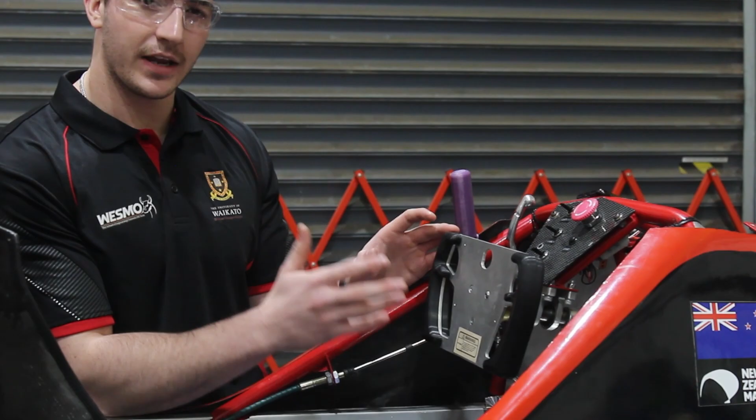WESMO's steering system has been one of the weaker sections of the car in the past, with drivers regularly complaining about the physical fatigue of driving the car. Because of this, my primary objective is to design a steering system that reduces steering effort as much as possible.

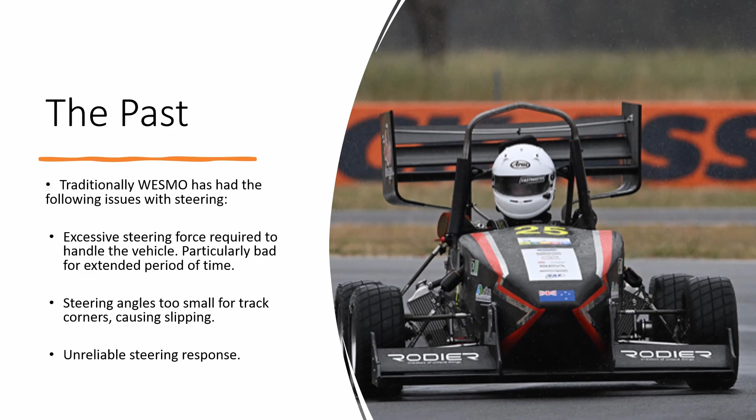The main sections of the car are the steering geometry, steering redirection and actuation systems. Each of these factors have a range of sub-factors that have a monumental impact on the steering performance of the car. So far, I have identified and chosen specific concepts for the individual elements that require design, such as the tie rod attachment position, steering rack, steering sensor, and the mounting brackets.

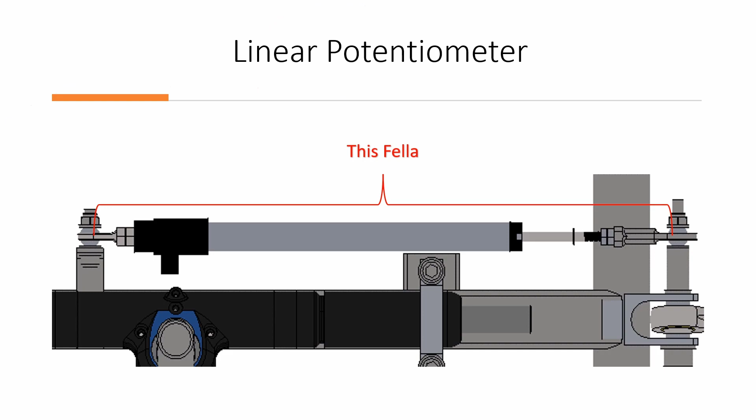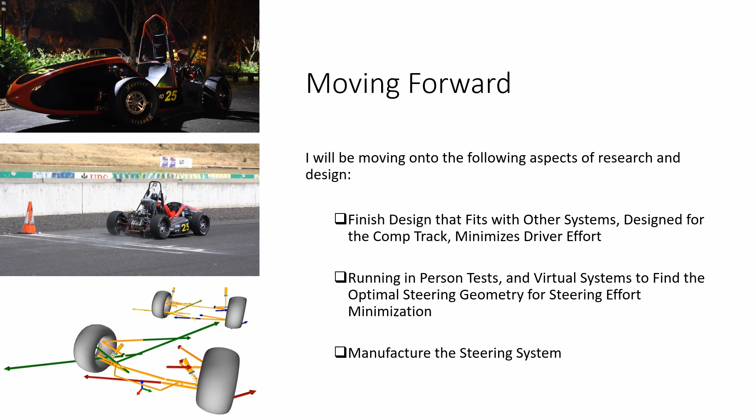Having run calculations on a number of these elements for design, the goal for the future of this project is to finish and build a steering system that fits alongside all other components of the car, as well as achieving the cornering and general performance requirements for the competition, while using software and physical testing on the 2018 and 2022 cars to identify an optimal steering geometry.

Alongside my responsibilities as the 2023 ICE team's technical lead, I'll be developing the car's suspension actuation geometry and the mechanical components that go along with it. My challenge is to balance the demands of performance with those of reliability in line with the team's overall goals.

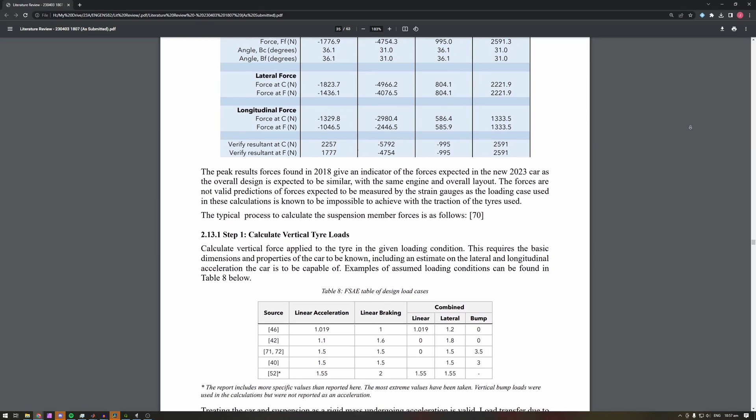My research focuses on the accuracy of our theoretical force calculations to improve our confidence in future designs. I will place strain gauges on the suspension arms of our FSAE car and record the real stress and strain in the suspension members for defined loading conditions.

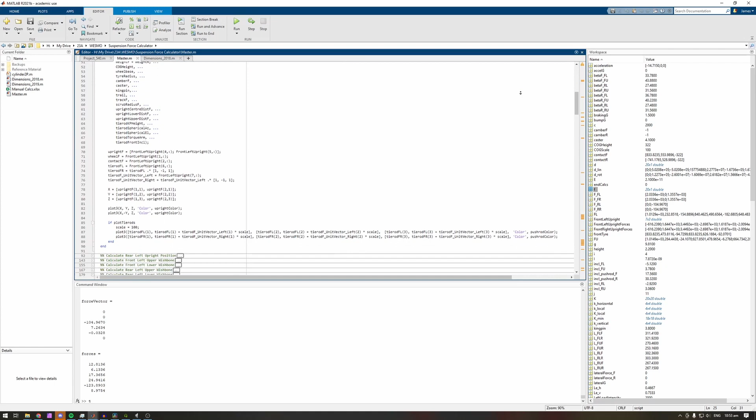I have produced a MATLAB model of our car. The model takes fundamental vehicle specifications and calculates the suspension geometry automatically. With it, we can calculate the forces in each suspension member for a given dynamic loading scenario. These forces are critical for both design and research.

I am partway through producing a detailed CAD model of the new suspension system. This includes brackets, adapters, OEM components, tubing for the front and rear wishbones, push rods, bell cranks, shocks, and anti-roll bars.

Hi, my name is Aidan and I'm developing the uprights and unsprung assemblies for the car. This includes the brakes, wheels and uprights.

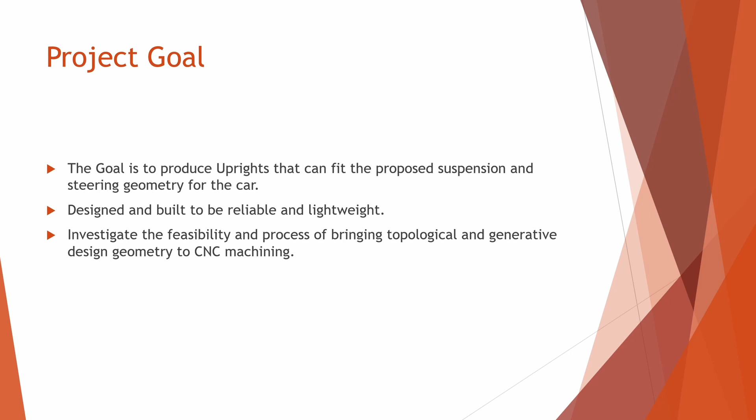As for my research topic, this is to develop a topologically optimized upright, optimized for strength and stiffness while minimizing the part mass. This is going to be using generative methods and focusing on using ANSYS to develop the part model. Where this project differs from other topological parts is to develop the design process and design for manufacture with a CNC mill rather than the typical additive manufacturing process.

So far, progress has been spent working with the suspension and steering teams to finalize the geometry and the key loading paths which will form the basis of the topological optimization.

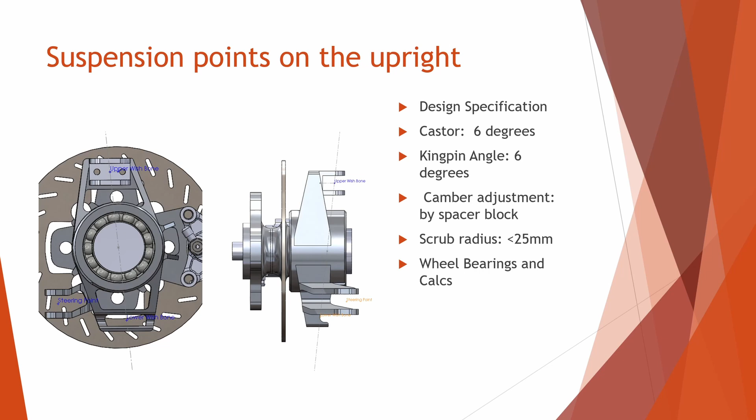CAD models of the front have been developed in preparation for FEA and optimizations. From here, the plan is to finish the CAD models and begin FEA and topological optimization, then manually go over the optimized result to tweak the geometry for CNC manufacture, then FEA again to make sure there's no significant changes. This is all to do before mid-June, which is our design freeze.

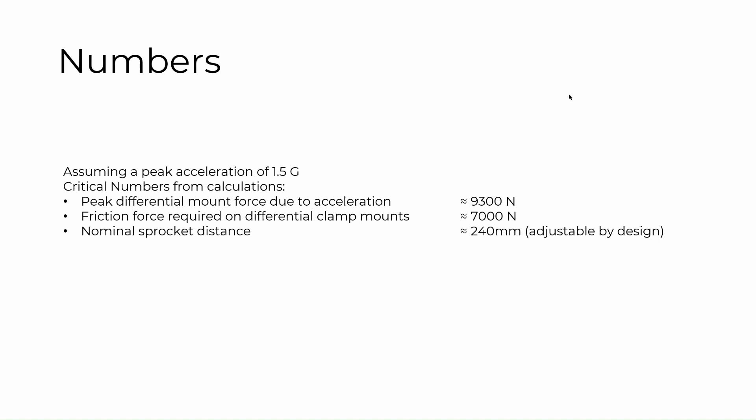My name is Daniel and my project for WESMO 2023 involves the development of the drivetrain. My research topic involves assessing the feasibility of a frictionally retained differential to allow for chain tensioning. In the project thus far, calculations have been done to determine how much force the drivetrain will need to be designed for. This includes forces that the engine-to-differential bracket will have to endure at peak acceleration, and suitable bearings to be used in the mounts.

Current CAD drawings depict the drivetrain dimensions relative to each other, such as the engine and sprockets. Brackets between the engine and the rear driveline are currently being developed in CAD, later to be optimised for stress and weight. The plan from here onwards is to finish the design of the drivetrain brackets and have engine mounting locations within the chassis by mid-June for the team's design freeze.

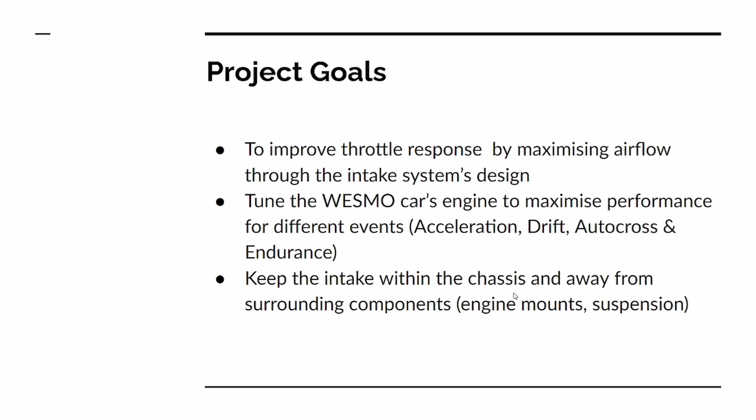Hi, my name is Ricko Agluba, and I'll be working on the air intake for the 2023 car. My project goals are to improve throttle response by maximizing airflow through the intake system's design, and to tune the engine to maximize performance for the different events, as well as keeping the intake inside the chassis and away from any surrounding components. My research involves finding the effect of plenum volume on throttle response.

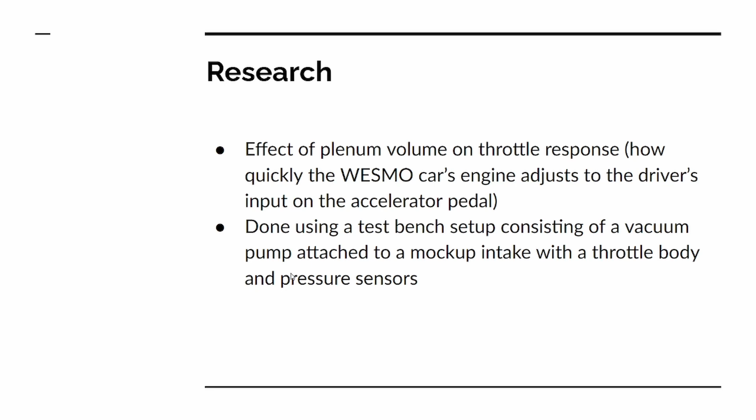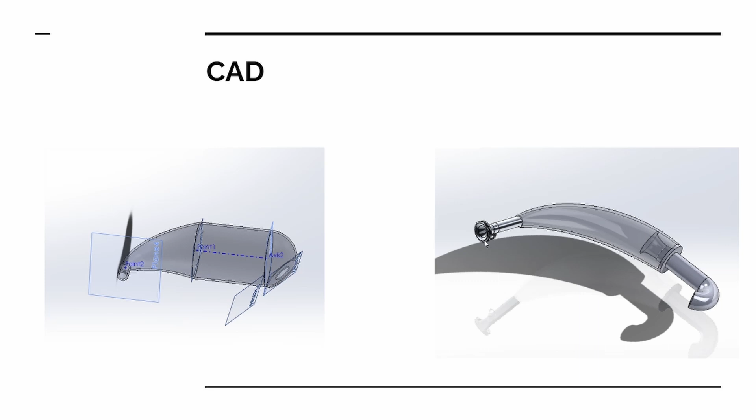This will be done by making a test bench setup consisting of a vacuum pump attached to a mock-up intake to mimic the car's intake system. I've also been doing some CAD models, very detailed ones on different shapes, but mostly the horn style intake to maximize airflow, and I've been doing some flow simulations on these models to look at the performance, velocity, and pressure of the air.

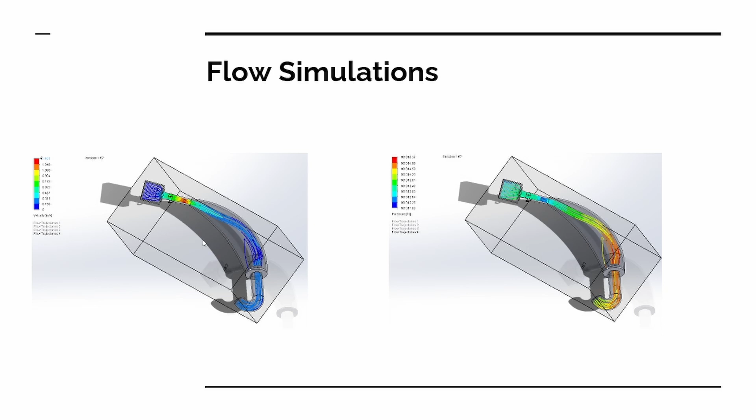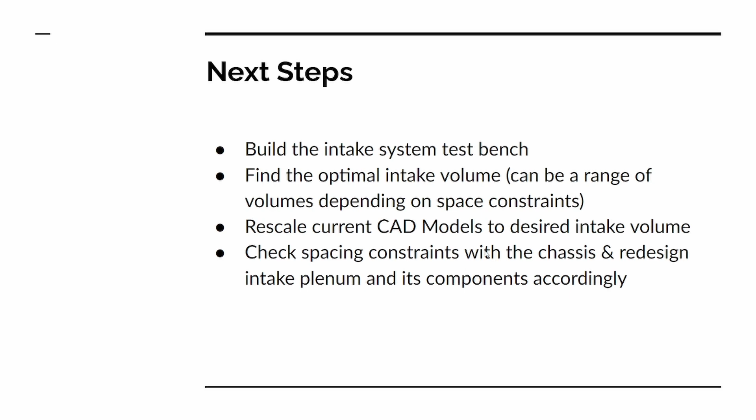My next steps will be to build this intake system test bench, find the optimal intake volume, rescale the CAD models to this optimal volume, and check spacing constraints with the chassis and redesign the plenum accordingly.

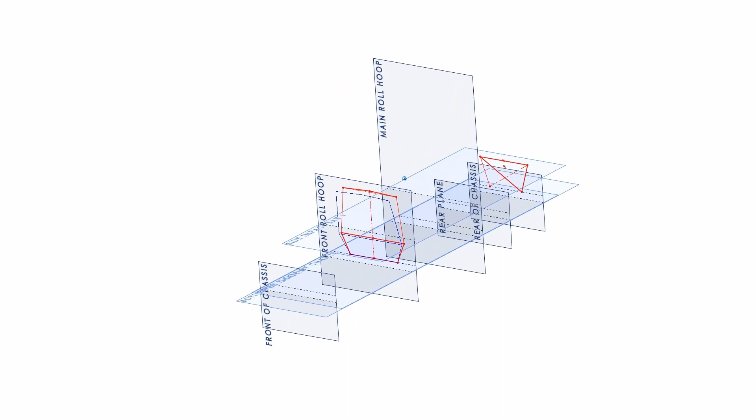Kia ora, my name is Zoe, and my goal is to make sure everything comes together with the car chassis. My research involves creating a design that is under 30 kilograms while prioritizing torsional stiffness. Through my literature review, I've determined the optimum torsional rigidity for our car to be between 1500 and 1800 Newton meters per degree. I currently have 3 space frame designs compliant with the updated FSAE rules.

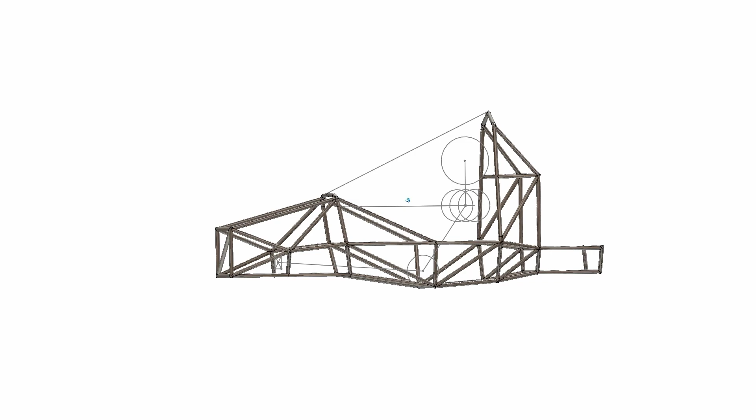FEA analysis will be done on ANSYS to make sure the designs have the required torsional stiffness. I'm also in charge of the ergonomics of the car. I've narrowed my focus on finding the optimum seat angle, gear shifter position, and overall cockpit layout to ensure the driver's comfort, all while complying with the strict competition rules.

To do this, I have collected driver feedback from previous years to inform the initial chassis and cockpit designs. The next step is to use an adjustable ergonomic jig with this year's drivers to determine the optimum cockpit layout. Finally, I have been working closely with the EV team to make sure this year's design is suitable for next year's electric car.

The ICE team for 2023 is focused on designing, building and racing one last internal combustion engine car before switching to a fully electric drivetrain for 2024.